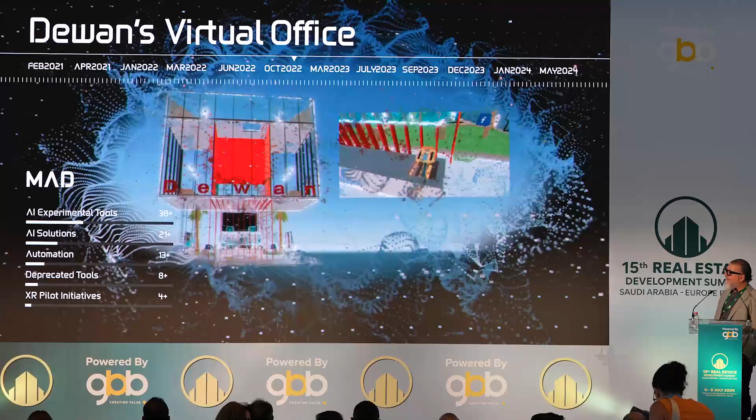Towards last year we started developing more programs and software that would help us in our production, in our design capabilities. We started investigating existing software, having some partnerships with other software developers to try and test and develop programs together. We've had quite a few in-house software developed, and some adapted to us.

I'll just go through 3 main aspects of what we are doing currently, the main 3 routes that we are using: the AI or the XR technologies.

We're always doing it simultaneously, the same time we're doing traditionally and through AI. So XR is actually quite interesting the way we're developing. We're doing a lot of design meetings through immersive architecture.

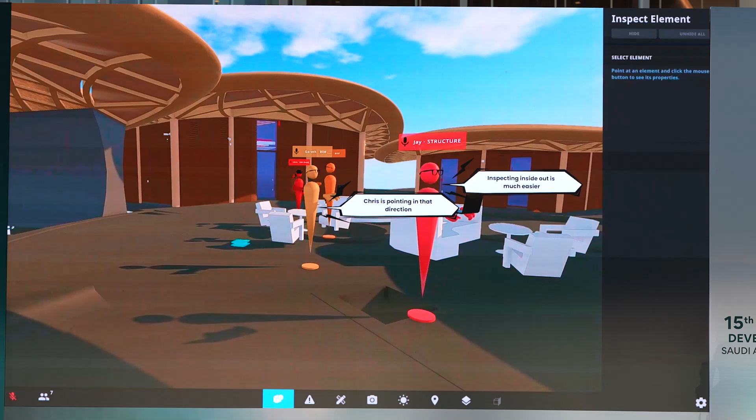This, for example, is a project in Saudi where we had the coordination meetings in BIM, where we gave color coding to all the different consultants, be it architecture, interior design, MEP structure, and we have virtual walkthroughs.

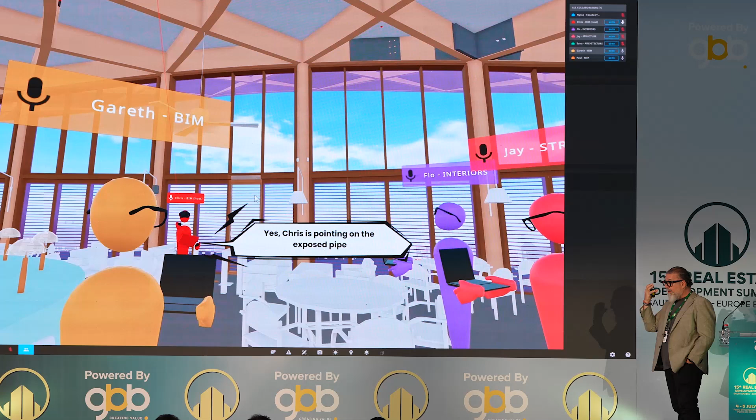People can be on their computers through their goggles, or we have also a dedicated room where you can have up to about 10 people walking around.

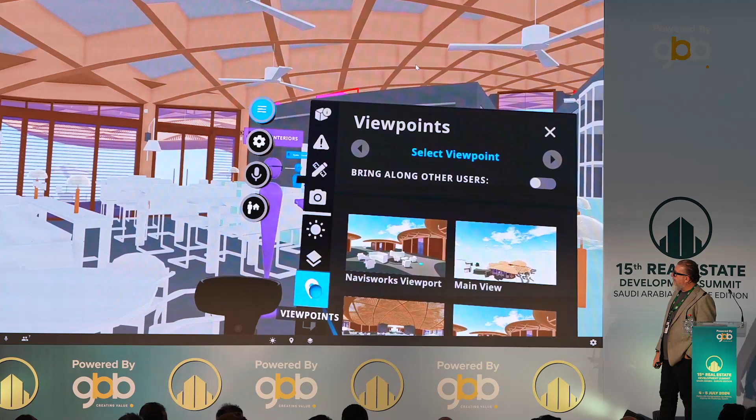So it's really a very nice 3D way, where whoever's leading, the design manager or the BIM manager, identifies a clash, points it out, creates an issue, and then summons the people that are involved in that part to give their

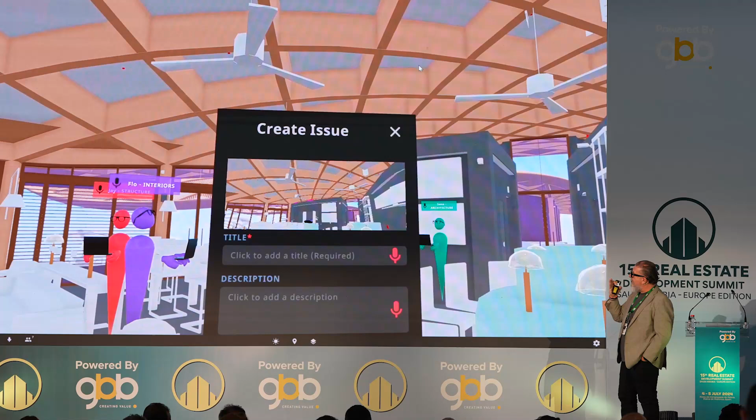comments. So in this case, for example, there was an MEP pipe sticking out of a certain area that shouldn't be there. Both ID and MEP discuss it.

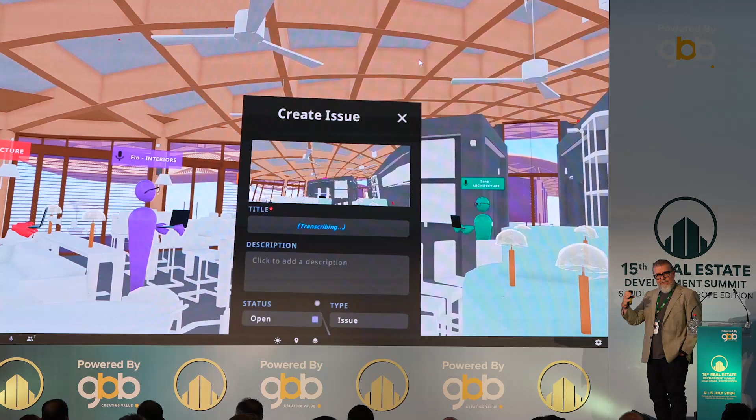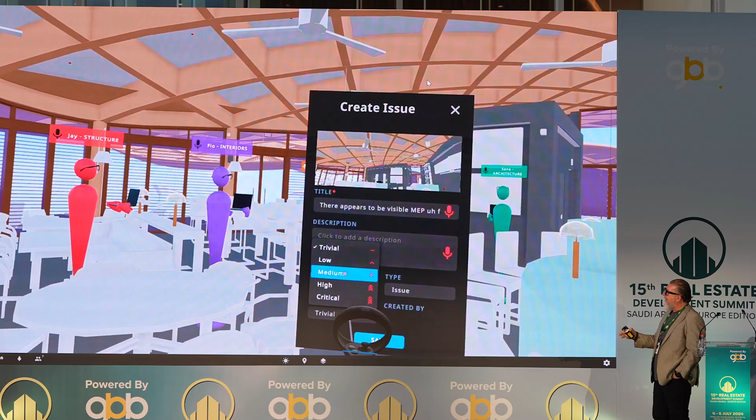We can bring out the actual details, the sections of that area as well, and sketch slightly on top of that as it's happening, to explain you need to move the pipe, you need to raise the bulkhead, something like that. It's really a very quick way of visualizing it between the whole team.

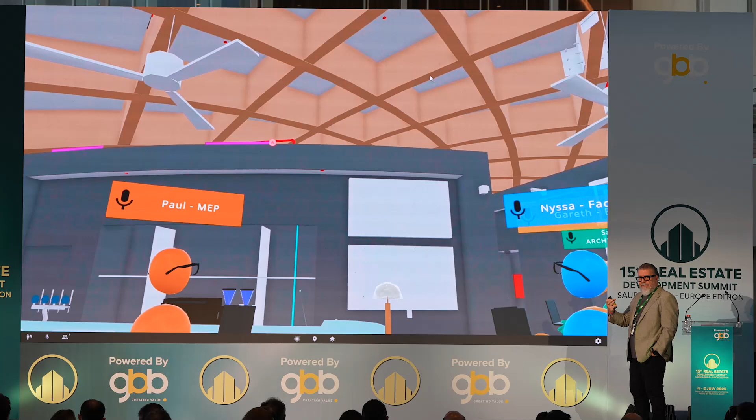For example, here you bring out the section, you tell the pipe has to go back, build up the bulkhead, and this is all registered and videoed with commentary in voice. You have the goggles with the speaker, so it's really like a real meeting, but without the heat of Dubai or Saudi.

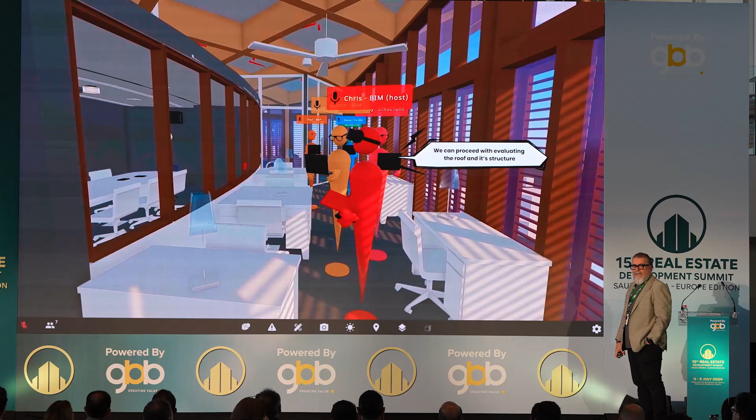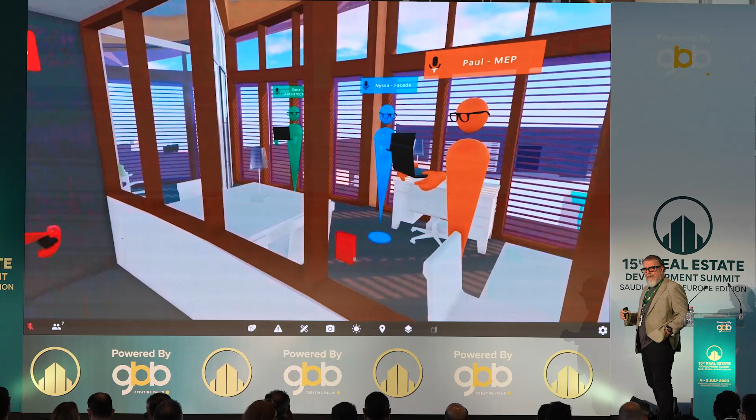This is another thing, there was another issue about FF&E where there's a summons again. Chris, for example, is the BIM manager, he summons everyone, everyone goes to where he is, and he identifies something. For example, here we have, I think there's an issue.

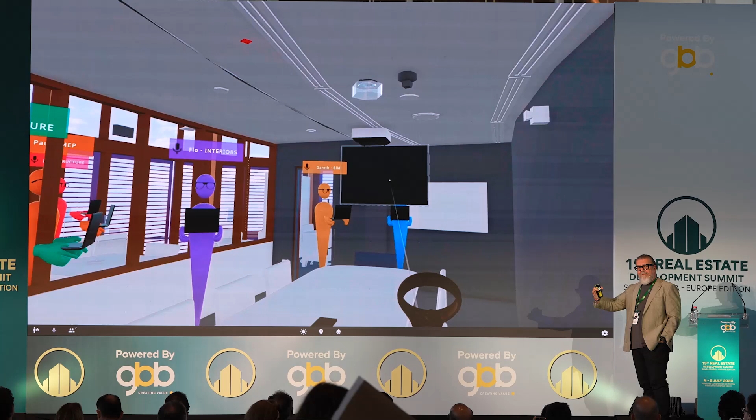Can't see the laser, but the TV, the FF&E, was not placed properly, so it creates the issue, registers it, ID comes in, says okay we'll move it back, it's registered as a clash, and then that's fixed, and then you just cancel the issue that was created.

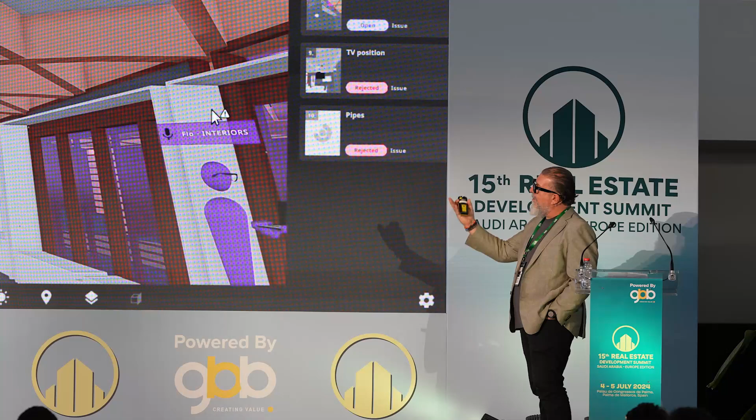Another thing, it's not just for clash detection, but because it's a full BIM model, we can actually test things. For example, when we go outside, you can simulate certain things. Here, there's a very curved roof, so the MEP was always straight, and you get these punch throughs, so you point it out so the MEP people need to raise the whole stacks of the firefighting pipes.

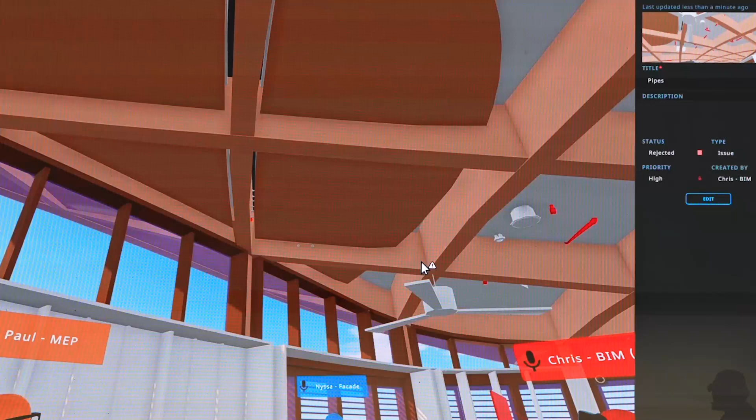And here you have a full register of each issue, whether it's rejected, open, if someone's resolved it, bits and pieces, a door needs to be changed or it needs to be moved.

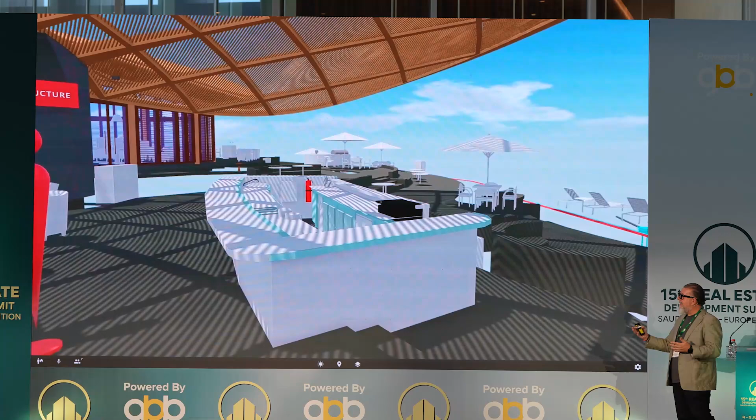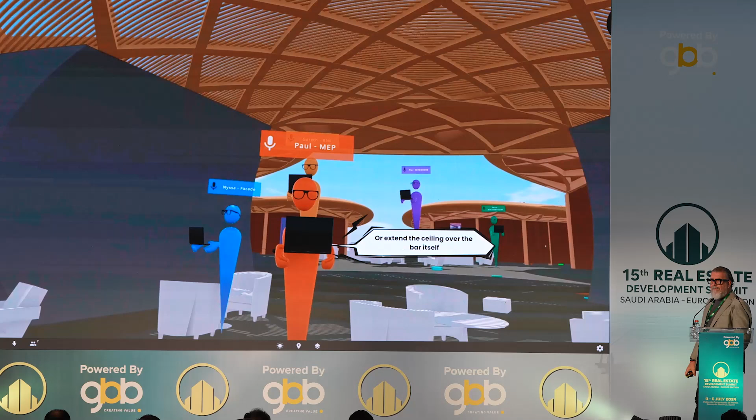And then things outside, which is very interesting as well, we can actually simulate the sun movement, so we can check things of the design during this site visit. For example, here we're doing the sun simulation, and we find out that the actual bar area where the barman is, is almost the whole day under the sun. So we propose either to move the whole bar area or extend the ceiling, things like that. That could be done in the meeting itself, tested, running the sun path again, and that gives us a very quick solution for a problem that usually is very difficult to see on drawings.

Color coding, I think it's quite good because everyone is doing it. With regards to BIM, it's really the automation of processes that we are developing within the standard BIM software that we have.

BIM produces a huge amount of data, and this data is very useful to be able to control it, to study it, to develop it in a way, and to use it in future projects.

We've developed some software, either a backup software, they're all autonomous, they work on their own. Certain software is saving us a huge amount of time by automating things, especially as these projects are getting bigger and bigger. The building models are getting huge, and with coordination and clash control, we're saving a lot of time of a BIM manager who has to be involved checking all these things, whereas a computer can look at it, develop it, give you the list while we're sleeping, and the next day we have a full clash control to proceed. We've developed about six different softwares for the time being.

Actually, even Autodesk is interested in one of them. It's basically controlling the data we have, sharing the data, sharing the backup, and the automation part of the actual processes that are involved in BIM.

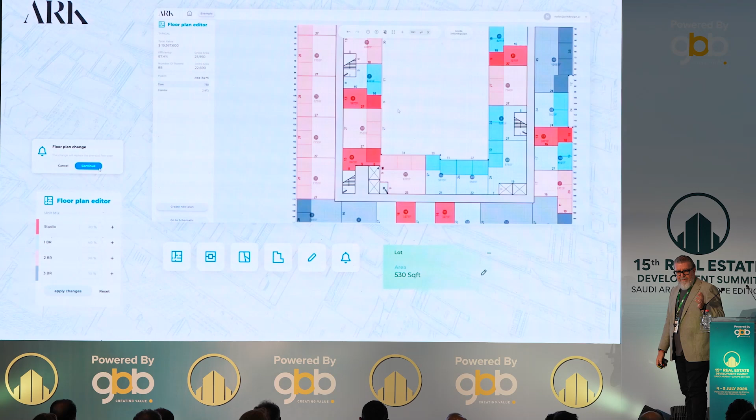The third-party software, I have very little time, so I'll fly through these. There's quite a few software out there in the market where we're trying to develop, and as I said before, we always run them in parallel. We do our in-house normal traditional design method, and we do the AI method.

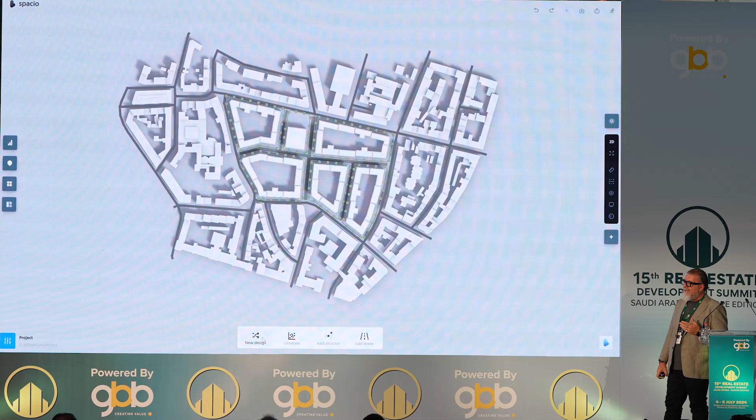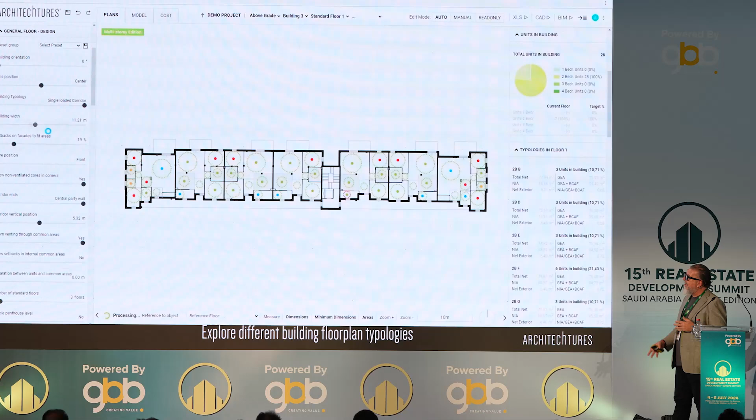But this is not new, it's just more popular now. Autodesk has had the generative design tool for maybe almost 15 years, we were using it especially for plans and interiors. But it's a very quick way of testing things, of offering, especially in residential, where the efficiency and the mix is very critical. It can study certain solutions at a much quicker rate, and it's not that it's designing for you.

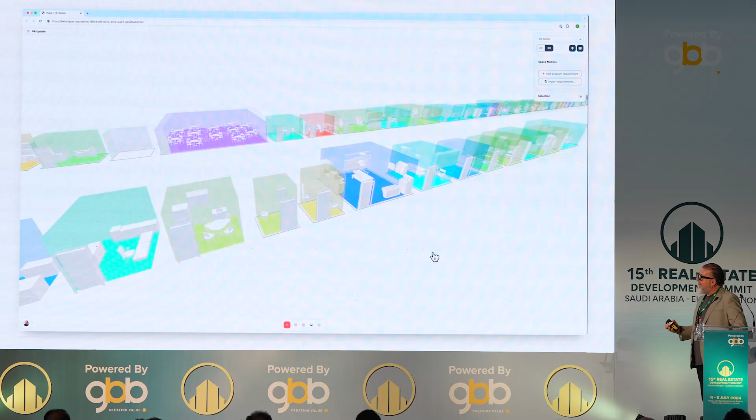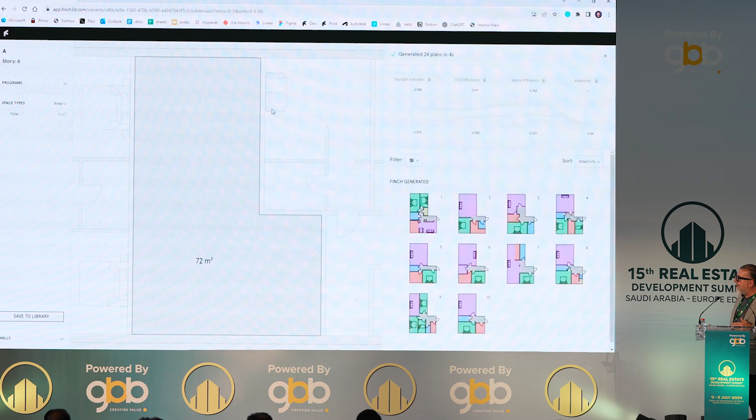It's the opposite, it gives you more time to design. It just tests and gives you all the permutations, all the possibilities in a much quicker way, where you can fix priorities that the 3-bedroom apartment has to be in a corner, the 2-bedroom has to be slightly smaller, things like that. And it gives you all the different orientations. There's quite a few programs out there that we're testing, and we're quite happy with quite a bit of them.

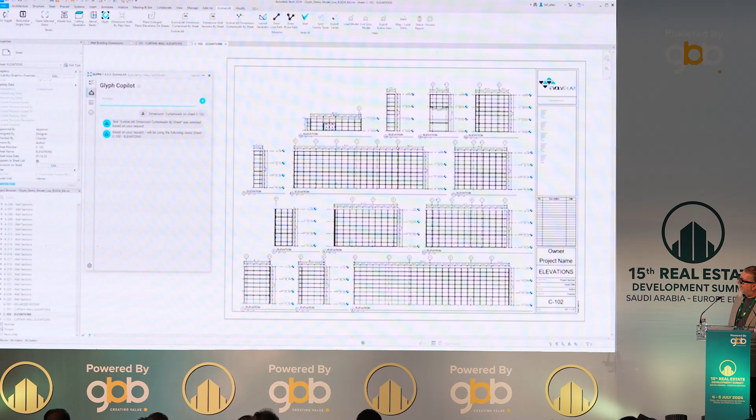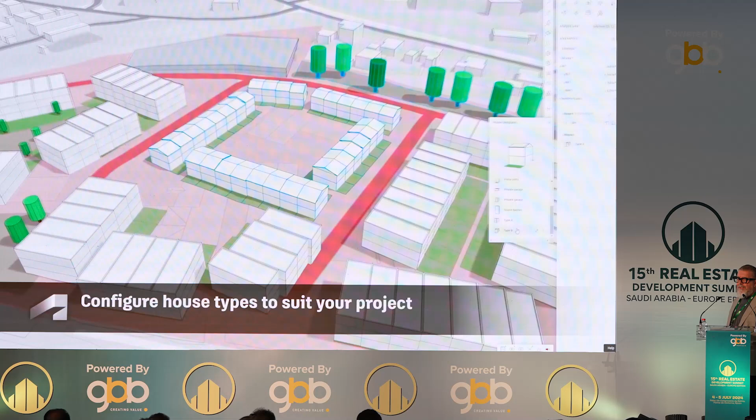So this is Glyph. This is actually a spectacular tool for BIM. What it does is give you the whole layout for a project automatically, you don't do anything really. It takes what a guy, a BIM manager, would take 2-3 days, and does it in 10 minutes. We've actually already incorporated Glyph as part of our processes as well.

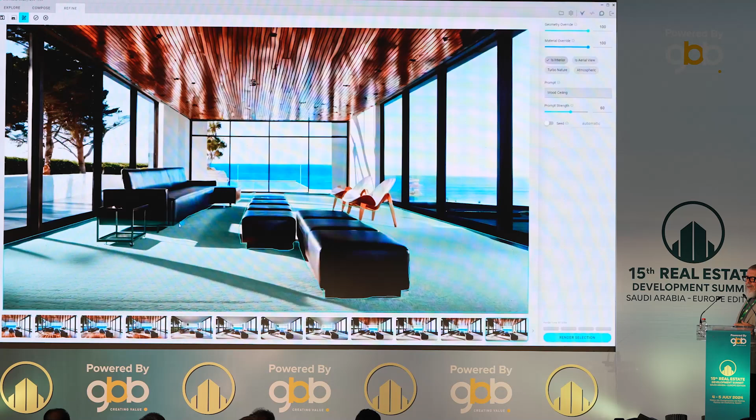There's some other tools which are more for visualization, which I think still have a bit more time to go because the materials are very static. So that's all in 10 minutes, and thank you.